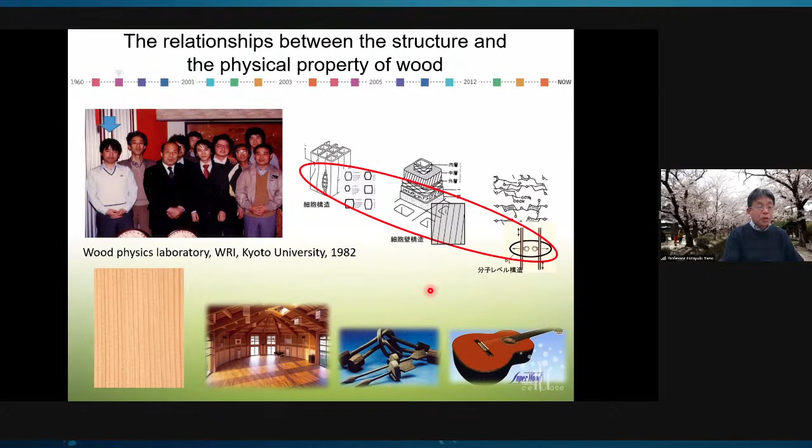At first, I'd like to explain my research background. I enrolled in the master's course of the Wood Research Institute of Kyoto University in 1982. I learned the relationship between the structure and the physical property of wood, for example, the relationship between microfibril angle and the Young's modulus of cell wall.

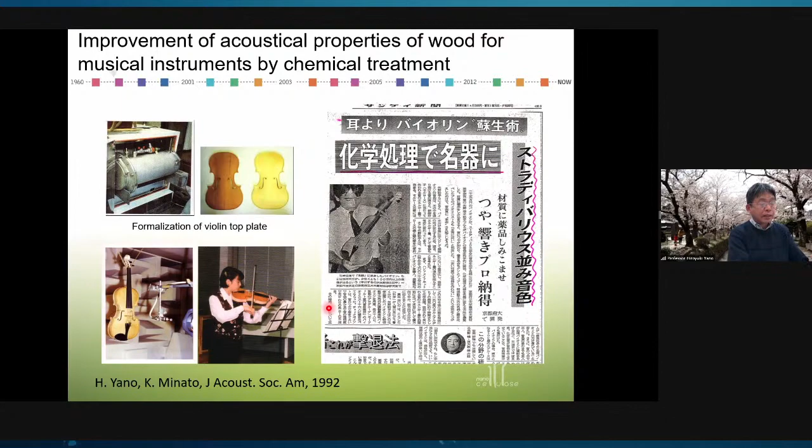For my PhD, I studied the improvement of the acoustical properties of wood for musical instruments. I made a violin with chemical treatment and received a PhD from Kyoto University. After the PhD course, I continued the study of acoustical properties of wood for another 5 years.

Then I changed my research topic to the production of high-strength wood because I found that the tennis racket structure is very similar to the structure of wood fibers. I also encountered a very interesting paper published in 1983.

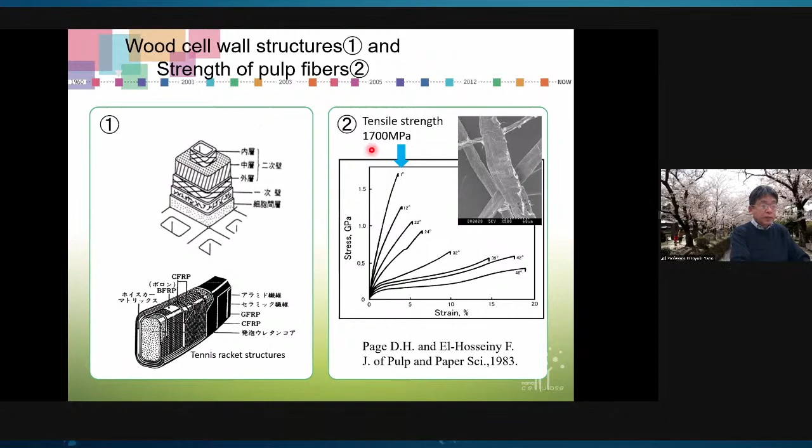In the paper, Dr. Page demonstrated that the tensile strength of kraft pulp reaches 1.7 gigapascal, that is 1700 megapascal. The tensile strength of pulp indicated that the tensile strength of cellulose nanofiber, cellulose microfiber, reaches around 3 gigapascal or more.

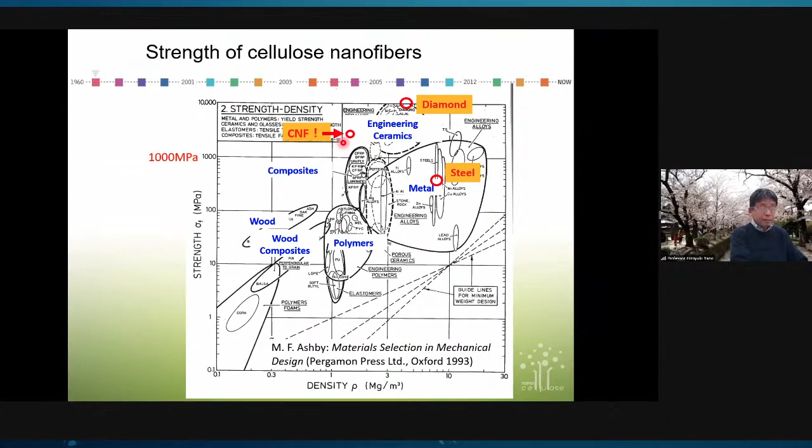As the strength of steel used for automotive doors and bonnets is around 300 to 400 megapascal, cellulose nanofiber is more than 7 times stronger than steel, while the density is 1/5 of steel.

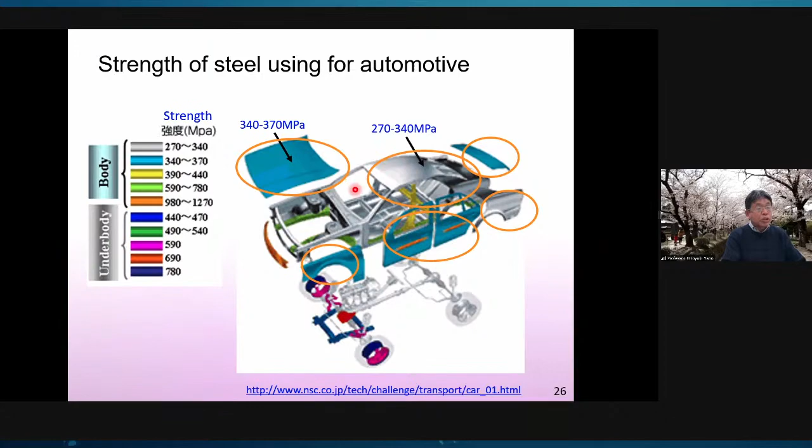The high strength of cellulose nanofiber is attributable to its semi-crystalline extended molecule chain structure. Because of these structures, CNF has high strength comparable to that of aramid fibers, as well as high rigidity.

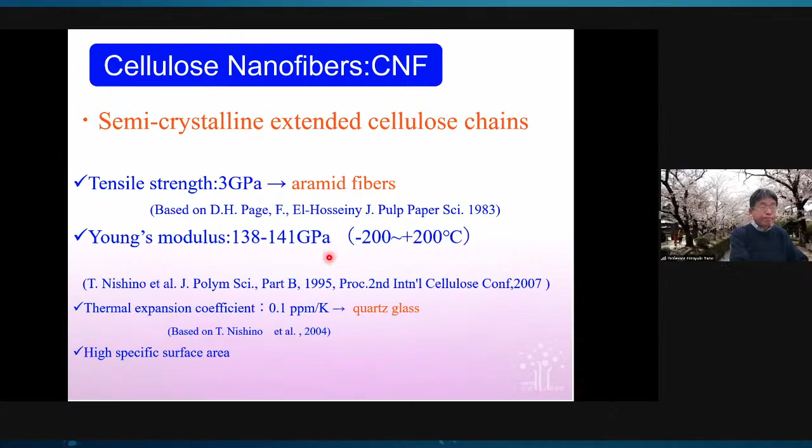At first, I made 100% cellulose nanofiber material using microfibrillated cellulose donated from Daicel Chemical. We squeezed out water by pressing using porous metal, then oven dried the cake and hot pressed at 150 degrees, 100 megapascal, for 30 minutes.

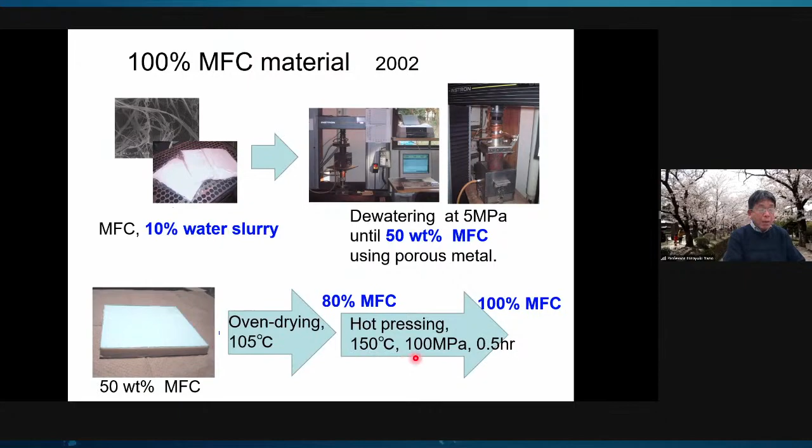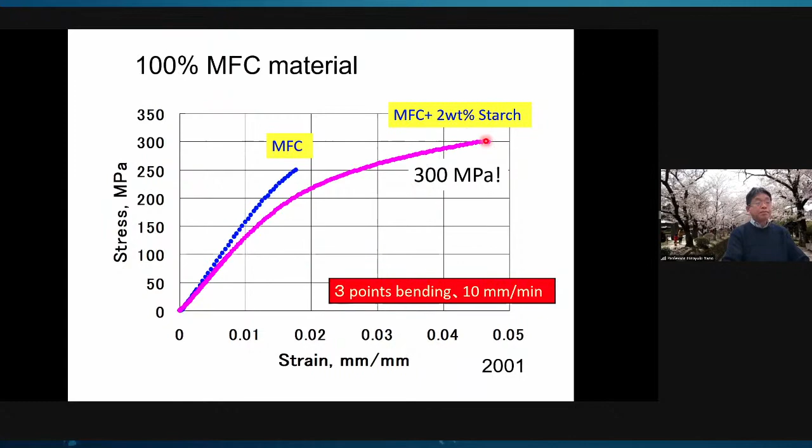This is a stress-strain curve of 100% MFC. The strength reached 250 megapascal in bending because of the hydrogen bonding between CNF networks. When we add oxidized starch just 2%, the strength reaches 300 megapascal. I was so excited with these results.

Then I further tried to make much more high-strength material using MFC or CNF. When we prepared a CNF sheet, impregnated it with PF resin, and hot pressed after lamination, the strength of the material reached 400 megapascal. This is as strong as steel used for automotive, while the density is 1.35 grams per cubic centimeter.

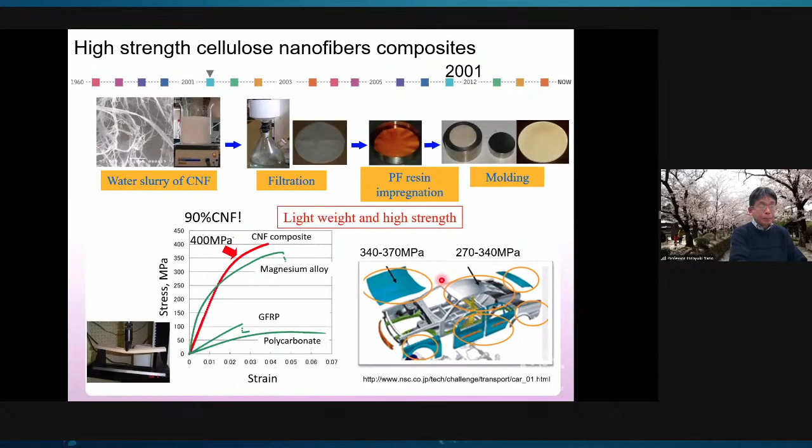In 2003, we developed an optically transparent and low thermal expansion cellulose nanofiber composite. The composite is as strong as steel, as thermally stable as glass, and as flexible as plastics.

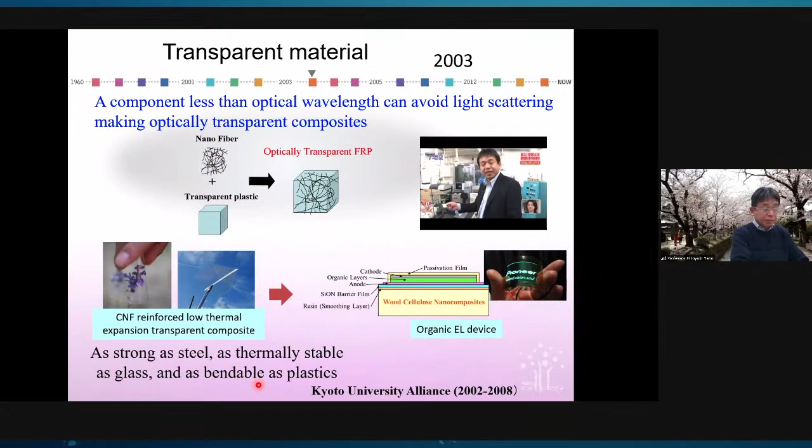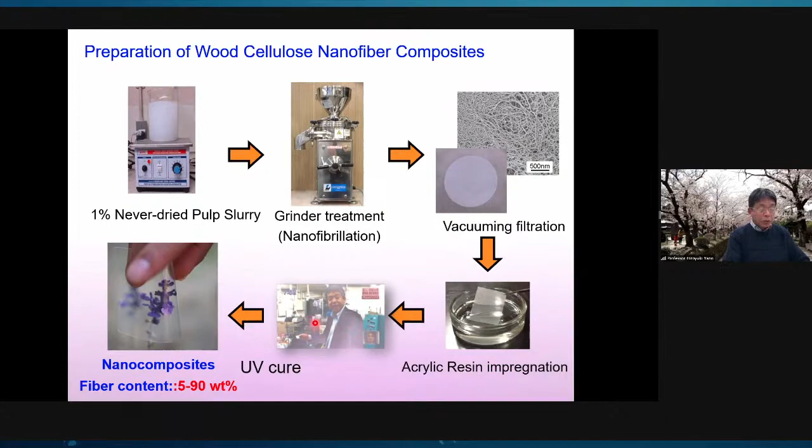This is the preparation process of the optically transparent composite. At first, we prepared a CNF sheet by vacuum filtration of CNF aqueous solution, then impregnated acrylic monomer to get rid of air inside. Also, we developed cellulose nanofiber reinforced natural rubber in 2006 using unmodified CNF, and in 2011 using hydrophobic esterified CNFs.

3% chemically modified CNF increased the rigidity of natural rubber by 8 times. 5% of chemically modified CNF decreases the thermal expansion of natural rubber from 226 ppm to 18 ppm, which is almost steel.

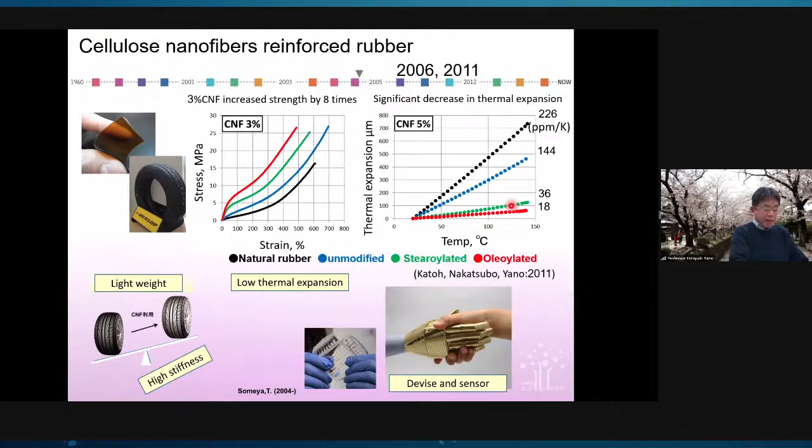Since then, I had been dreaming to make an automotive from forest using high-strength CNF material and optically transparent, low thermal expansion CNF materials.

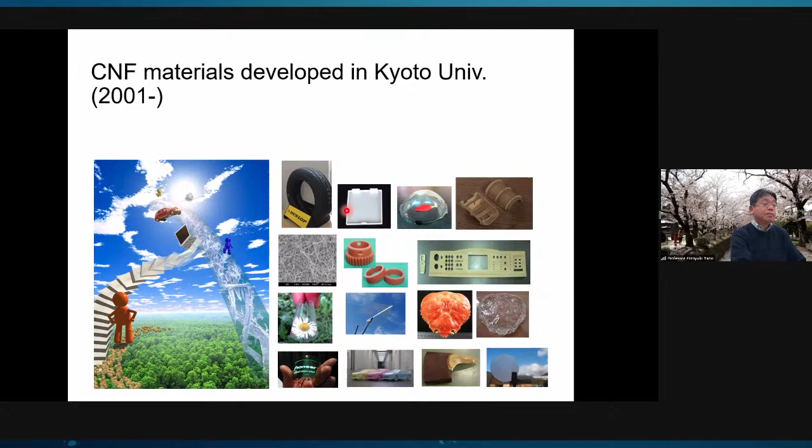To make my dream more realistic, we developed a melt compounding process to make CNF reinforced plastics, because among many expected applications of CNFs, there is a great demand for the reinforcement of thermoplastic resin.

If we replace 10% of plastic, or 5% of plastics, with $8 per kilogram CNF, it generates a 120 billion dollar market.

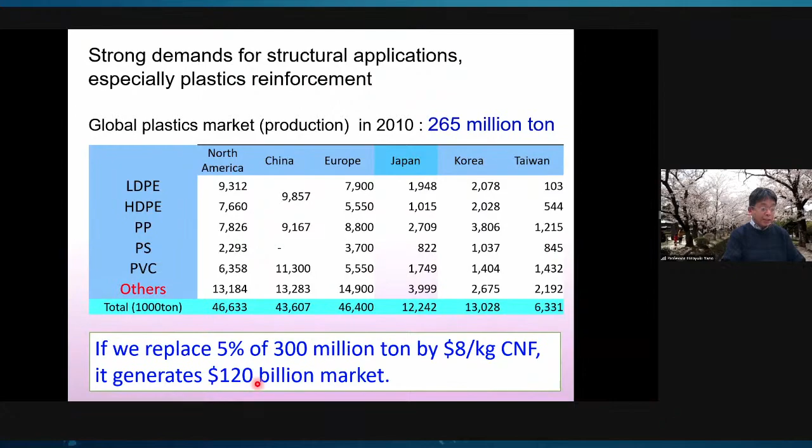Then we studied the reinforcement of thermoplastic by CNF using melt compounding. This is a production system which consists of esterification of CNF, melt compounding of chemically modified CNF with PP and PE, and injection molding of the compound to make nanocomposite samples for the test.

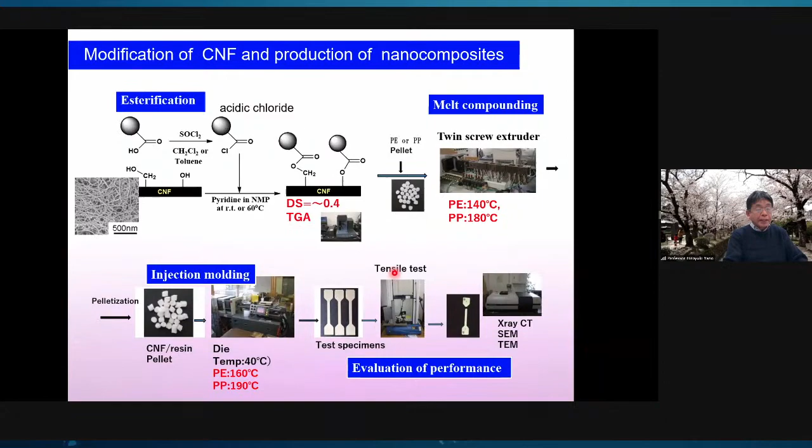We studied the effect of functional groups incorporated on the surface of CNF for the reinforcement of PP and PE, polyethylene, using linear fatty acid and cyclic fatty acid.

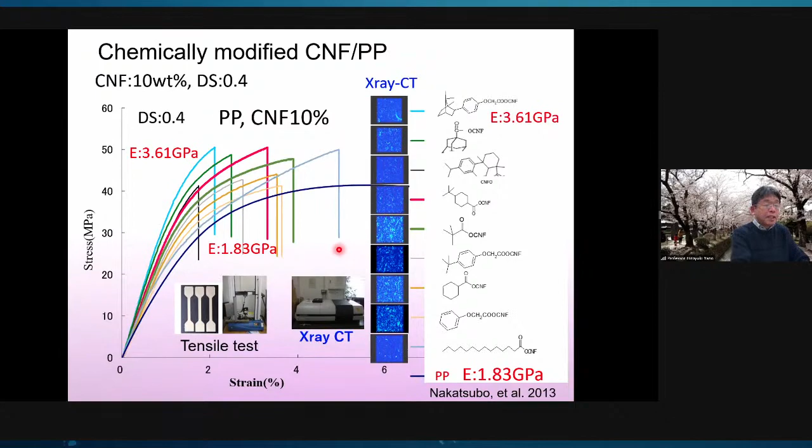On the basis of these results, we focused on ASA treatment. ASA is alkenyl succinic anhydride, and this is the structure. It shows that 10 weight percent CNF addition increases rigidity of high-density polyethylene by 4.5 times and decreases the thermal expansion to one-fifth.

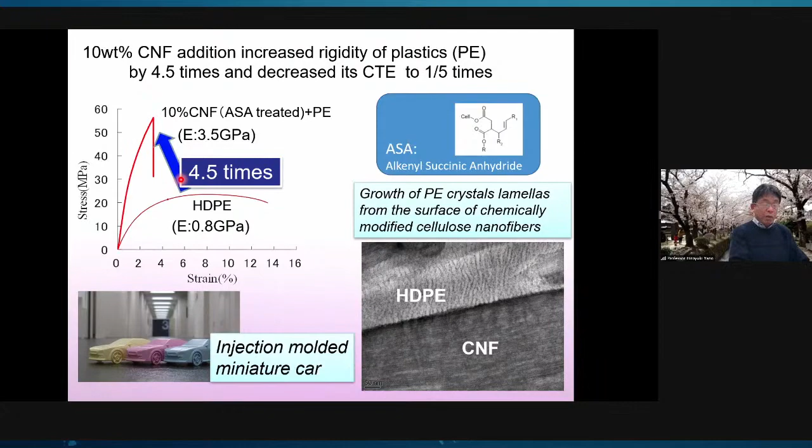However, there was a big hurdle to commercialize ASA-treated CNF reinforced PP and polyethylene. That is production cost. Pulp is around 50 cents or $1 per kilogram, but after disintegration of pulp to make nanofibers, the price increases to $20 to $50 per kilogram.

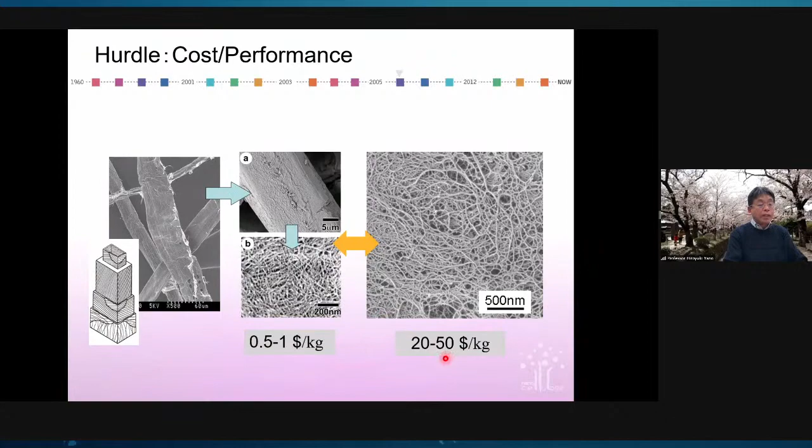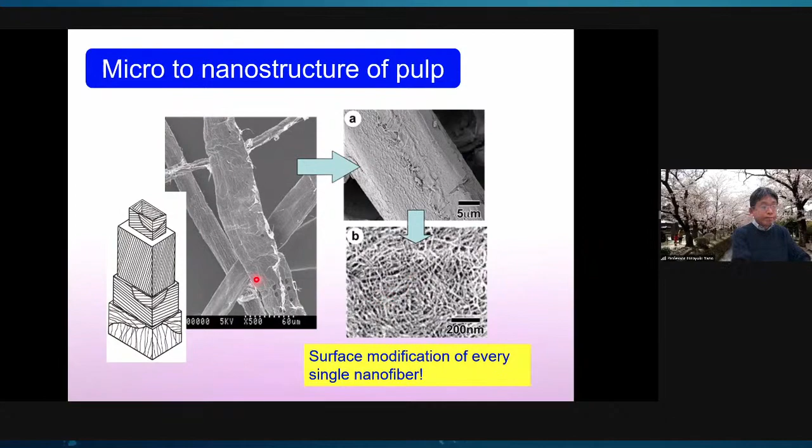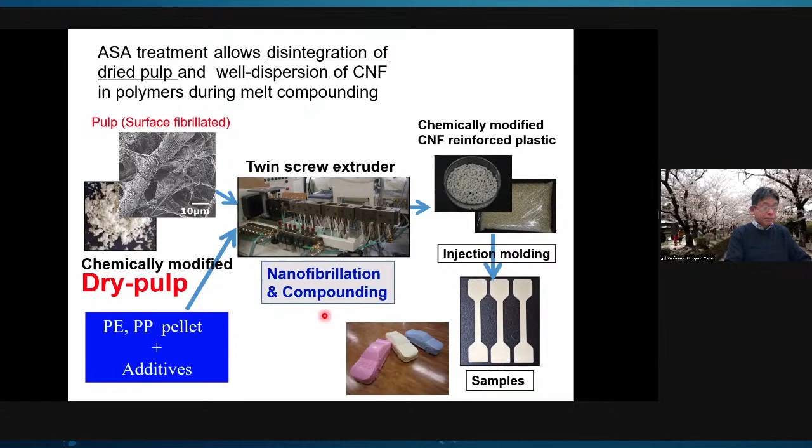Then we studied a process to reduce production cost and found that when we ASA treat the surface of every single cellulose nanofiber in pulp, it allowed disintegration of dried pulp and well dispersion of CNF in polymers during melt compounding. Here you can see that dried pulp nanofibrillates during melt compounding.

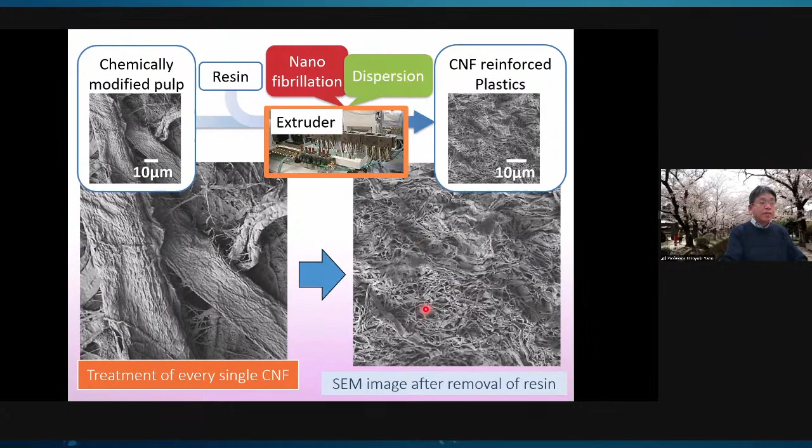Before supply to the extruder, put in the extruder, it is pulp. But after melt compounding, it becomes individualized cellulose nanofiber that reinforces polymers. We name this integrated production process the Kyoto process, a process that simultaneously nanofibrillates the dry pulp and uniformly disperses the CNF in the resin.

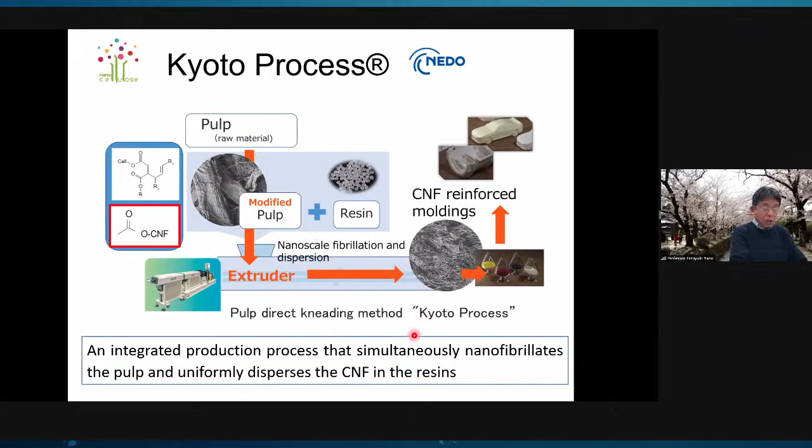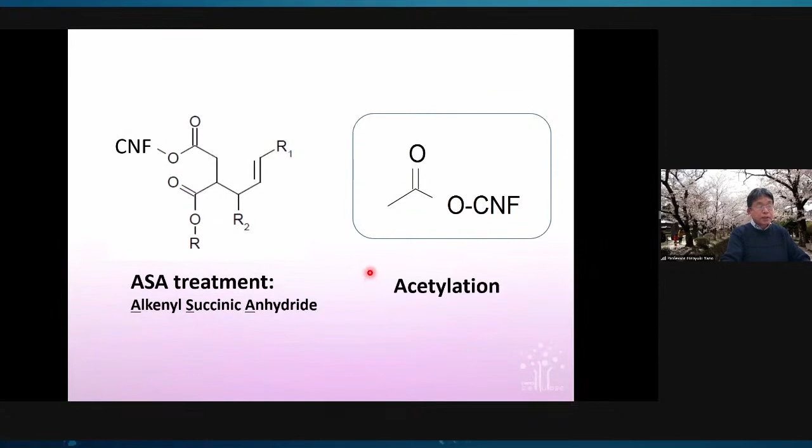For the Kyoto process, in addition to ASA treatment, we are using acetylation for polyamide 6 or PLA, because acetylation improves the thermal durability of CNF by around 20 degrees, which allowed melt compounding with polyamide 6, which has a melting temperature of 225 degrees.

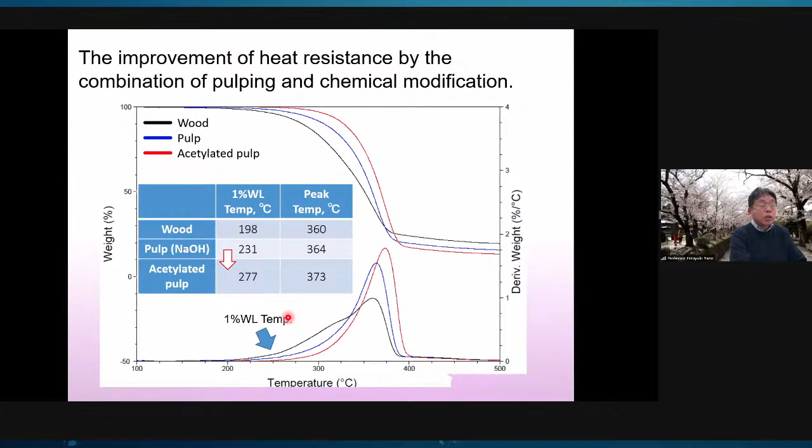10 weight percent CNF reinforcement using acetylated pulp and the Kyoto process increases Young's modulus of polyamide 6 from 2.22 gigapascal to 5.3 gigapascal, 2.5 times.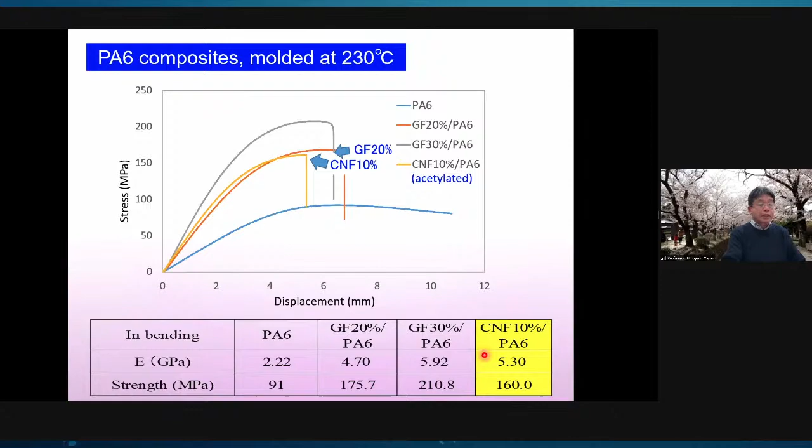Acetylated CNF disintegrated by the Kyoto process also increases rigidity and strength of POM, polyacetal, PLA, and PBT, around 2 times.

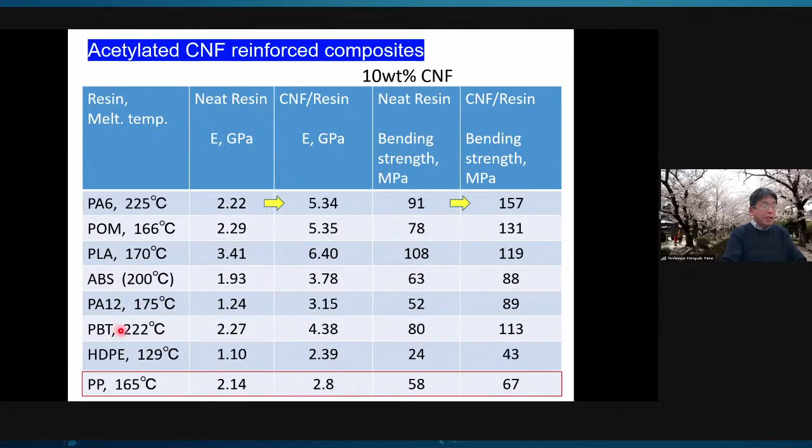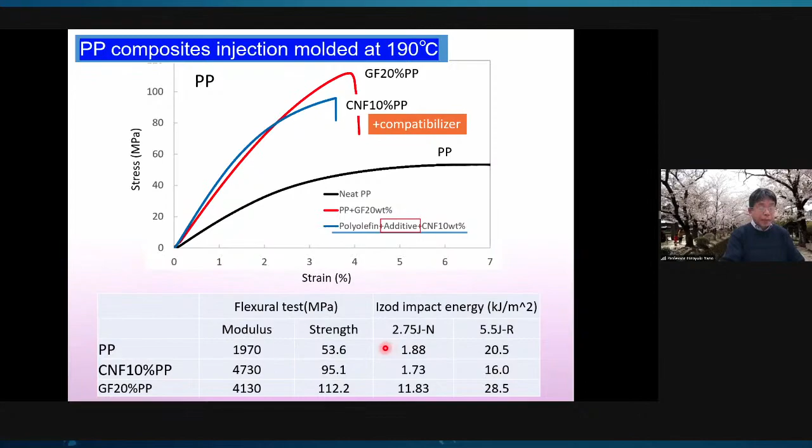When we mix 10 weight percent acetylated pulp with polypropylene, compatibilizer, and inorganic filler, then knead it at 200 degrees Celsius, the Young's modulus of PP reached 2.5 times that of the neat resin. The strength became twice.

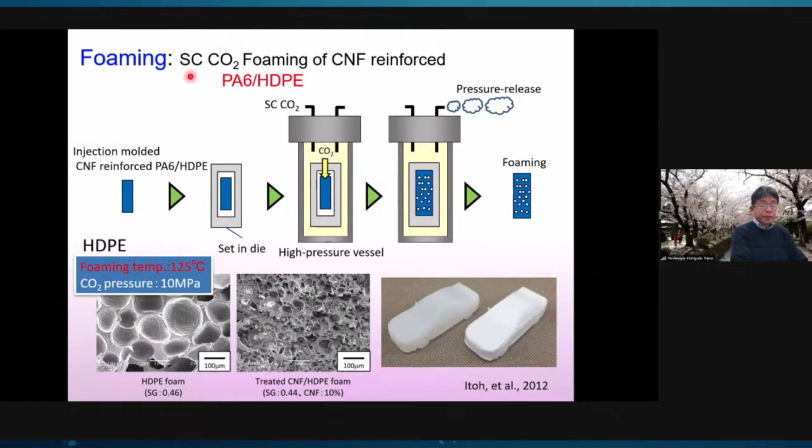Foaming is an important part of cellulose nanofiber composite to make lightweight automotive parts. Supercritical carbon dioxide or nitrogen foaming is applied for this case. Here you can see that cellulose nanofiber contributes to making tinier bubbles than inorganic fillers. At the same time, it gave a quite smooth surface of the foamed product.

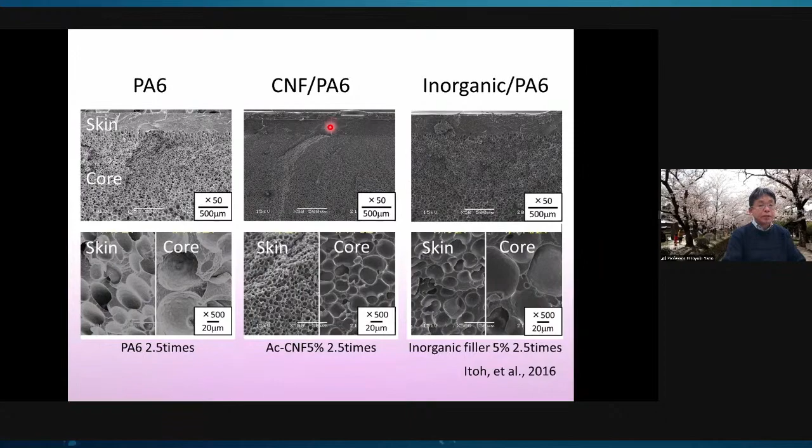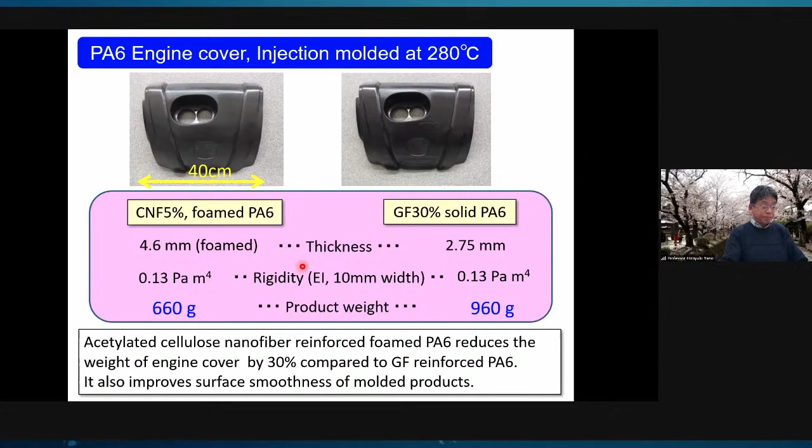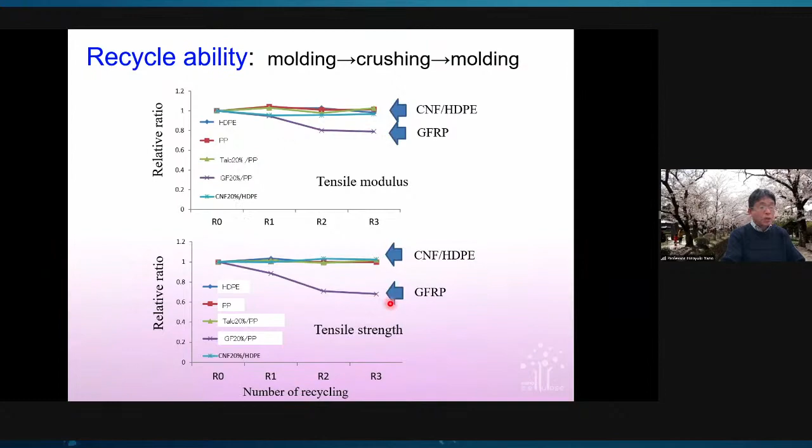Seiko PMC constructed a commercial plant based on the Kyoto process of ASA treated pulp in 2017. And Nippon Paper constructed a test plant based on the Kyoto process of acetylated pulp in 2017. The product from Seiko PMC's commercial plant has been used for the midsole of ASICS running shoes since 2018, and 7 million shoes have already been sold globally.

Gathering this technology of CNF material, we started a project to make a nanocellulose vehicle in autumn 2016, supported by the Ministry of the Environment in Japan.

I invited Dr. Usuki, a very famous researcher in the field of nanocomposites and polymer science, to this project as project leader. He used to belong to the Toyota Central Research Institute.

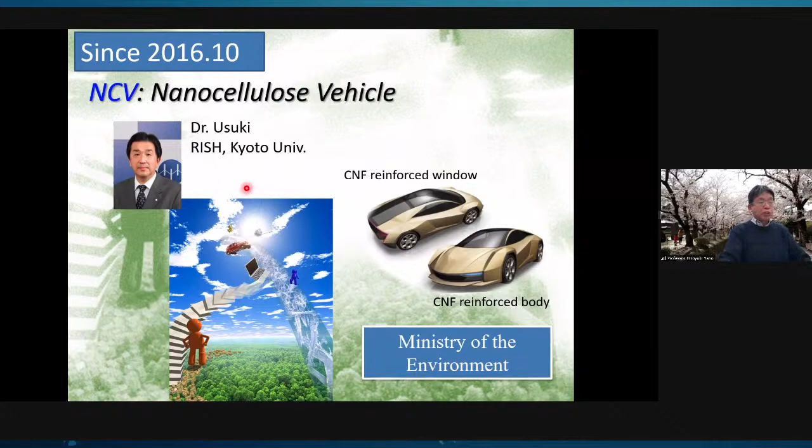We invited 22 companies and institutions, including Denso, Toyota Boshoku, Toyota Motor East, and others.

Now we are exhibiting this NCV at my institute. Please watch this video.

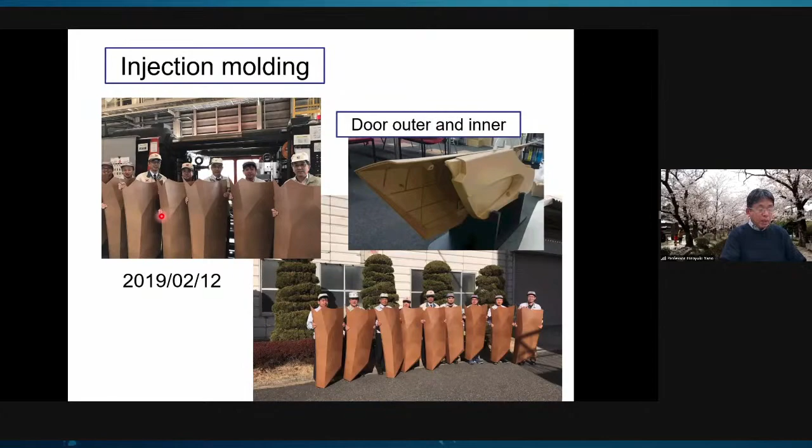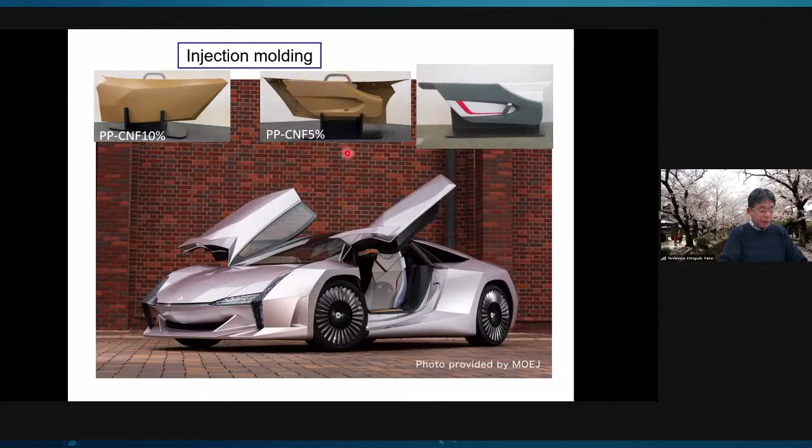These are injection molded outer parts of the door. Outer parts of the gull wing door are made of injection molded foam, 10 weight% cellulose nanofiber reinforced PP. Inside door trim is injection molded foam, 5 weight% CNF PP.

We made a rear spoiler and front undercovers by blow molding. The seat cushion is made of foam CNF polyethylene.

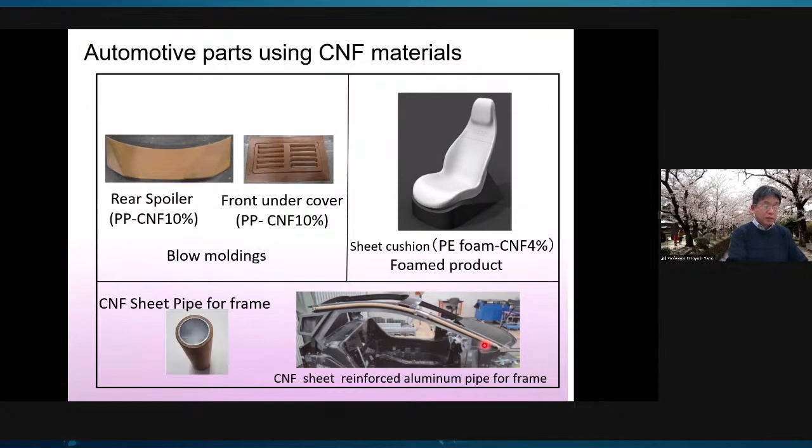CNF sheet pipe is applied for the frame of NCV. Optically transparent CNF reinforced polycarbonate is applied for the roof, rear windows, and back door of NCV.

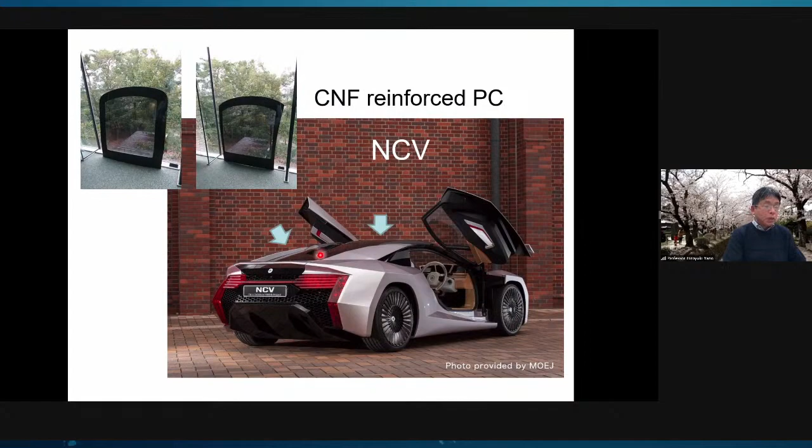We developed 3D printing technology in this project. The powder bed fusion method, PBF method, was applied for 3D printing fabrication using CNF reinforced polyamide 6 powders.

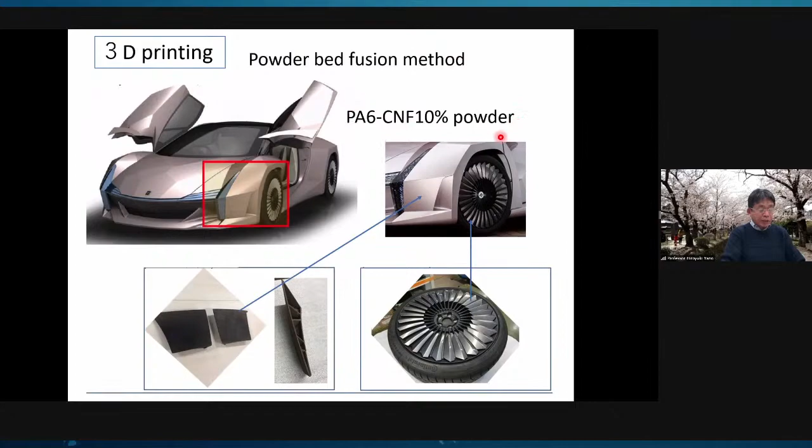Here you can see 13 types of automotive parts onboard NCV. In total, we estimate a 16% weight reduction of the automobile using cellulose nanofiber materials, and an improvement of fuel consumption by 11%.

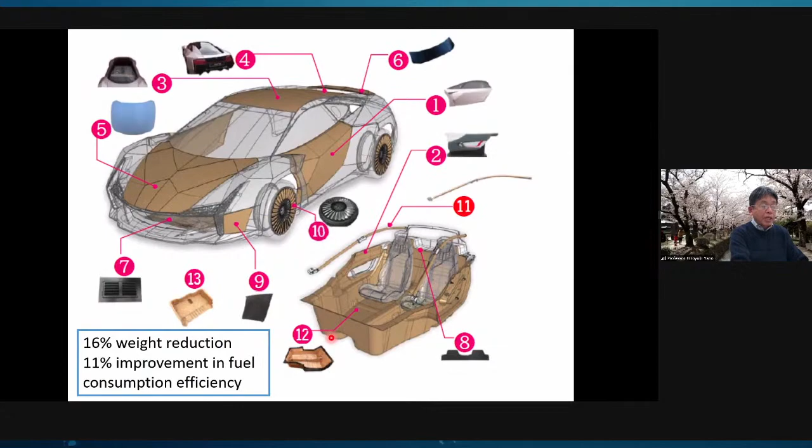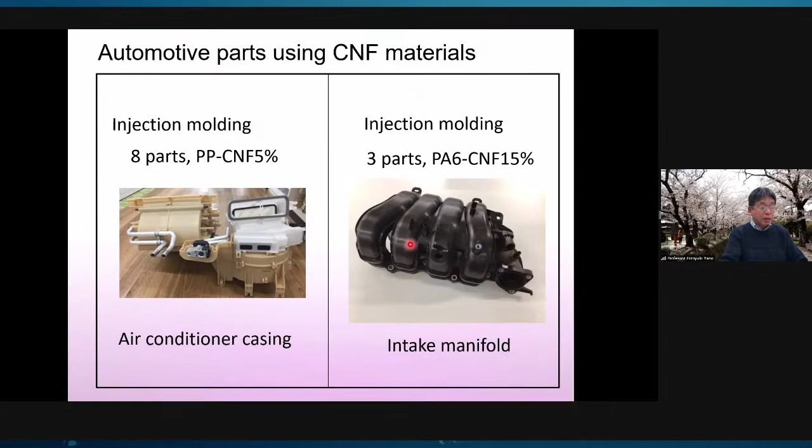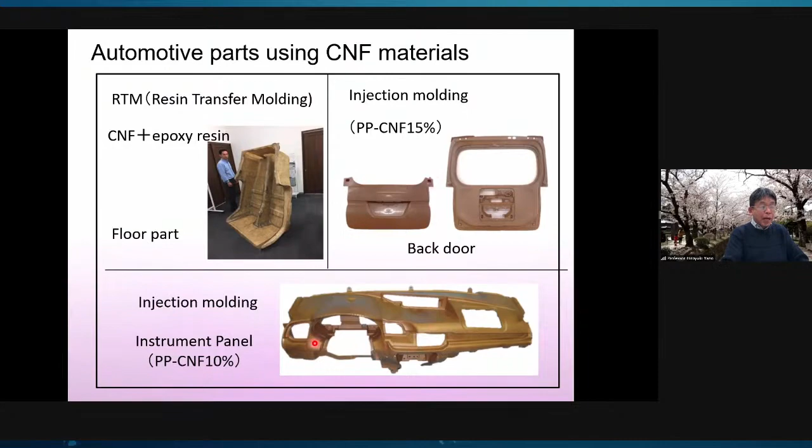Although we didn't onboard it on NCV, we manufactured an air conditioner casing consisting of 8 CNF polypropylene composite parts, and an intake manifold consisting of 3 CNF polyamide 6 composite parts. We made large floor parts by resin transfer molding, a back door, and an instrument panel by injection molding.

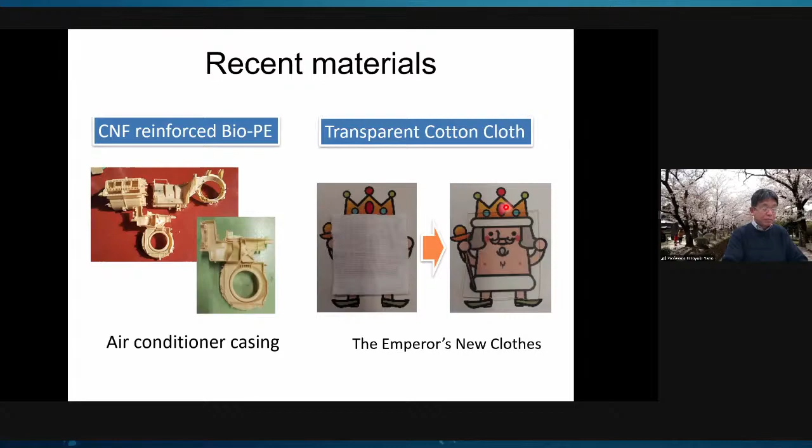10 weight% CNF reinforcement increases the rigidity of biopolyethylene from 1.1 gigapascal to 2.7 gigapascal. And interestingly, it attained a 30-degree higher heat distortion temperature, HDT, at 1.8 megapascal, than PP talc composite.

HDT of cellulose nanofiber reinforced polyethylene reaches around 100 degrees Celsius.

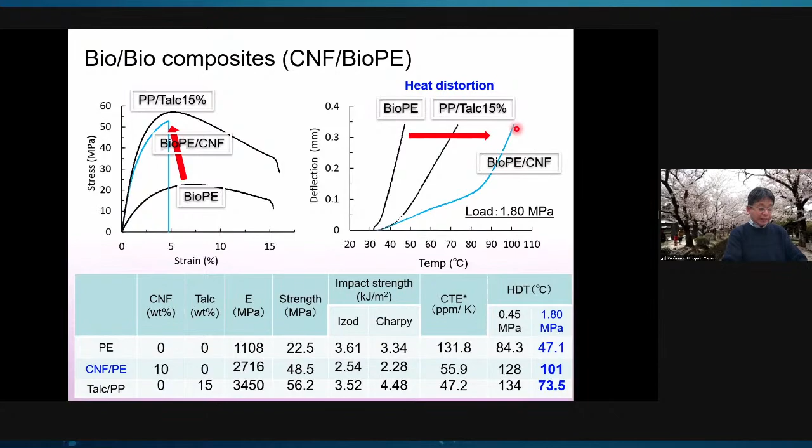We also developed cotton cloth. I would say this is a world-first, real emperor's new cloth. I like these images.

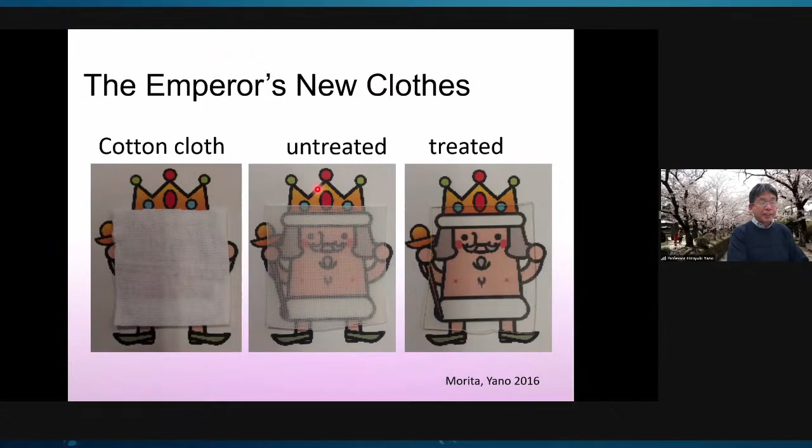So I would like to move to today's conclusion.

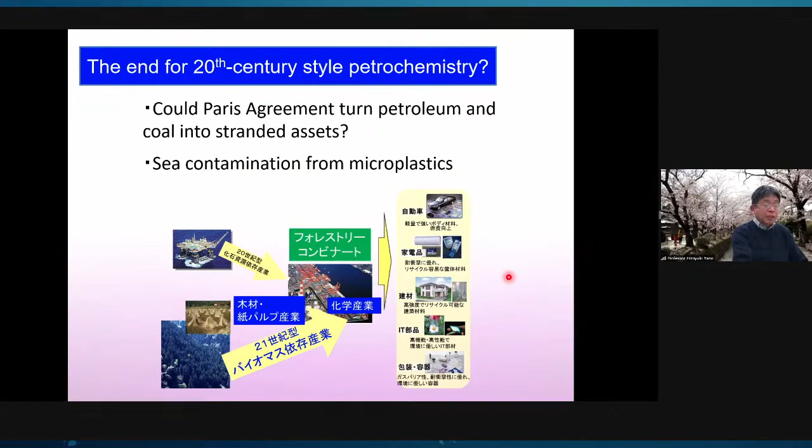The 20th century was a century driven by fossil fuel resources. It became clear that we are approaching the limit, in the form of global warming and climatic changes.

Regarding how we are to live in the 21st century, we cannot expect humankind to suddenly become wiser. At the same time, the level of social demand will grow continually.

To fill this gap, we need to show our respect for the mechanisms that natural life forms, structures created over hundreds of millions of years, and gain their help.

On the first day of the Tokyo Motor Show, the Minister of the Ministry of the Environment, Mr. Shinjiro Koizumi, brought Mr. Akio Toyoda, President of Toyota, to the NCV booth and explained the potential of cellulose nanofiber materials. It was really a great honor for us.